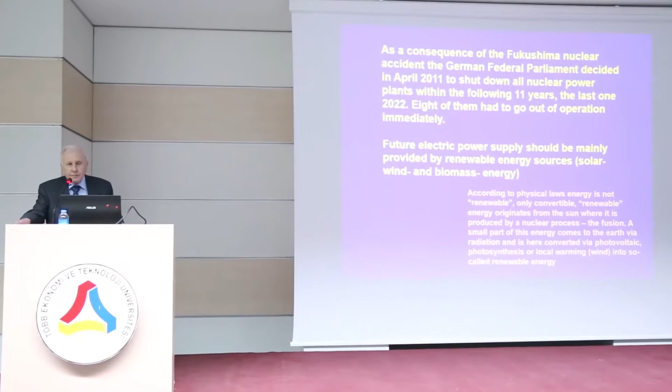About half a year before Fukushima, the German government decided to prolong the operation time of nuclear power plants in Germany. After Fukushima, they decided to phase out, so that all nuclear power plants would go out of operation within 11 years, with the last one shutting down in 2022. Eight of them had to go out of operation immediately.

The aim was really honest: to have a balance between sustainability, reliability, and economy. Let me discuss a little whether we reached this, or whether we are on the way to reaching it.

What changed after Fukushima? On the left-hand side we have power, on the right-hand side we have energy. People very frequently forget that energy is power times time.

Before Fukushima, about 45 gigawatts were invested in photovoltaic and wind. In nuclear power, there were just 20 gigawatts invested. But the energy is completely different.

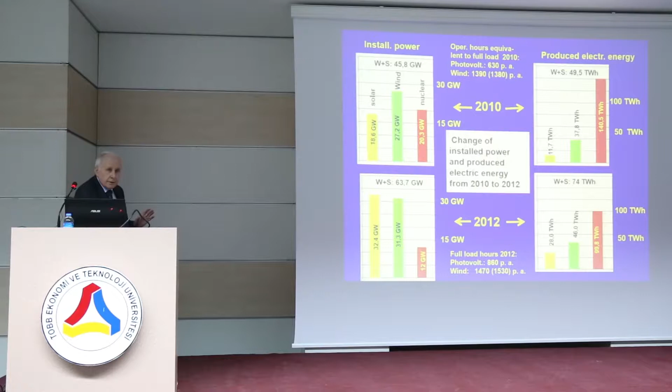Due to the short working periods of these renewable energy sources, I have to say at once: Germany is not a sunny country. So we still had a high amount of energy coming from nuclear power.

We had a high amount from nuclear power, and here it is after Fukushima. The green energy, from wind and photovoltaic panels, went up to almost 64 gigawatts. Still, it was much lower together than the energy produced by nuclear power.

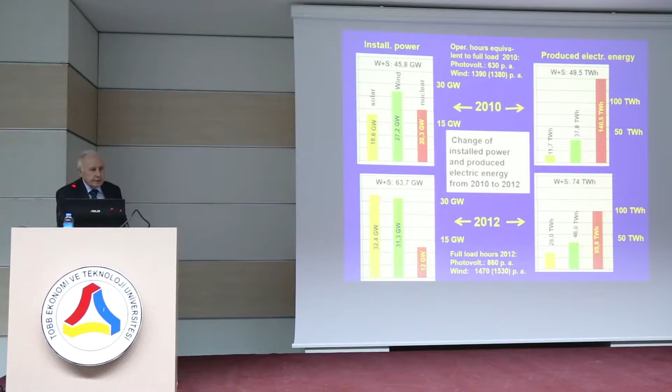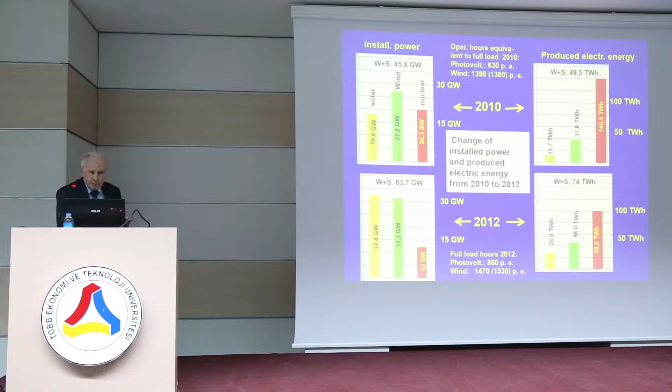The reason is, in Germany, photovoltaic panels have a so-called full load period of approximately 800 to 900 hours per year. Wind plants have a full load power period of about 1,400 to 1,500 hours per year. This is the reason, and this will follow us and cause us trouble.

So the intention of the German government to enlarge renewable power is very, very ambitious. You see, this is until 2050.

My problem is that I can't see it very well. But a man has glasses, you see, then I see it here.

So the intention is to install, by 2050, almost more than 150 gigawatts. The mean consumption at present is this one. So we really have much more installed power, not much more energy, but much more installed power in the future. Here we are, about in 2014, 2015.

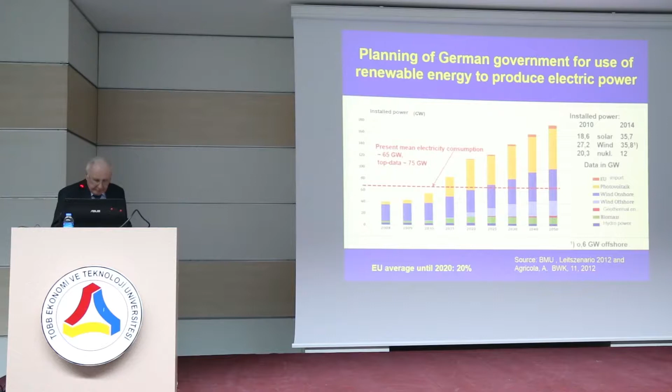Now let's discuss reliable supply. Is sun and wind energy reliable?

As I told you already, Germany is not a sunny country. The month has in total between 720 and 744 hours of daylight. In summer we have quite good irradiation, about 250 sunny hours. In winter, January and December, we have very few sunny hours. This means the output of photovoltaic panels fluctuates a lot.

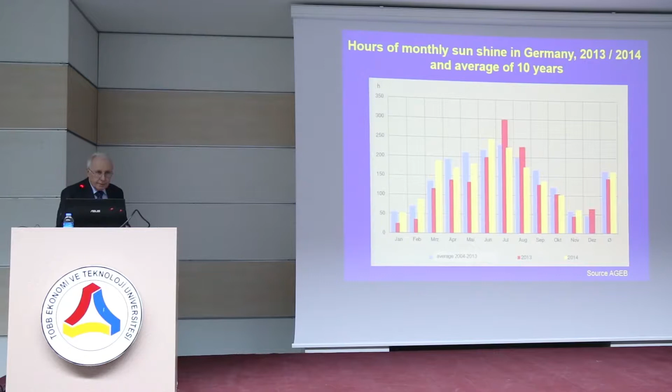It is similar with wind. We have wind velocities between 5, 6, and 7 meters per second. We have very strong winds at the coast of Germany, and much lower wind going south. People should know that the electric energy output of a wind plant goes with the third power of the wind velocity. This means very simply, if the wind velocity is reduced to 70% further south, then the power is only 0.7 times 0.7 times 0.7, which is 35%.

That's also the reason why, for example, in Bavaria, wind plants are up to 200, 250 meters, but then they are not very beautiful to the country. So the best wind situation is in Scotland, north of Scotland.

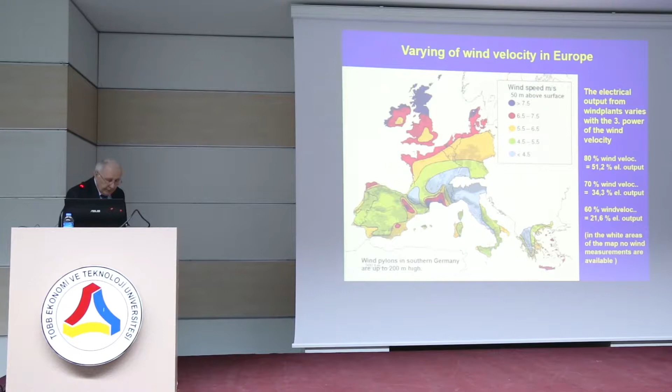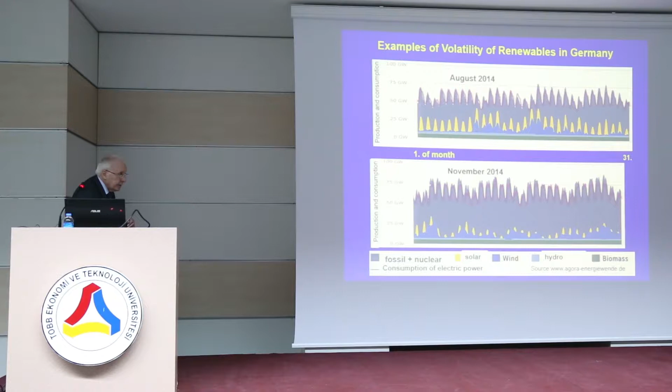And this, now here perhaps a little more drastic picture. This is December, between 1st and 10th of December 2014, and also between 1st and 10th of June 2014. If we just compare it, the contribution of sun, wind, and biomass in winter was in the order, if I remember well, of 3.5 gigawatt. In summer, it was in the order of 29 gigawatt.

So the difference had to be filled by fossil and nuclear power stations. This means in summer, you don't need many of them. So 26 is about a capacity of 32 fossil power stations. In summer, you don't need them. In winter, you need it. But they have to always be available, most of them have to be in hot standby.

This has, in future, the consequence that these fossil power stations do not earn enough money because they cannot produce enough energy. So E.ON, one of our big utilities, lost 2 billion euro during the last 1 or 2 years. In future, this would mean that we not only have to subsidize sun, wind, biomass, and so on, we also have to subsidize the fossil-fired power stations because they are not economic anymore. And this is a strong burden.

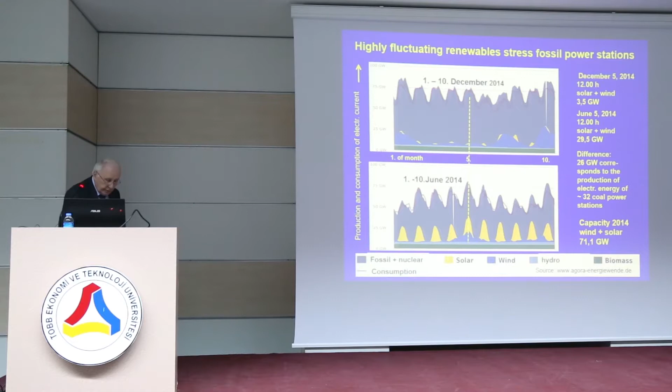Now you can argue, but with offshore wind power stations, it is much more stable because on the sea, the wind is always blowing. It's not quite true. You see here, again, in February and January this year, in this grid, which I show you, only about 600 megawatt were installed. And you see, we have full power, then we have calm, sea calm, and it's similar in January. You could have the same picture for summer and so on. That is, wind on the sea is more stable, but is not reliable at all.

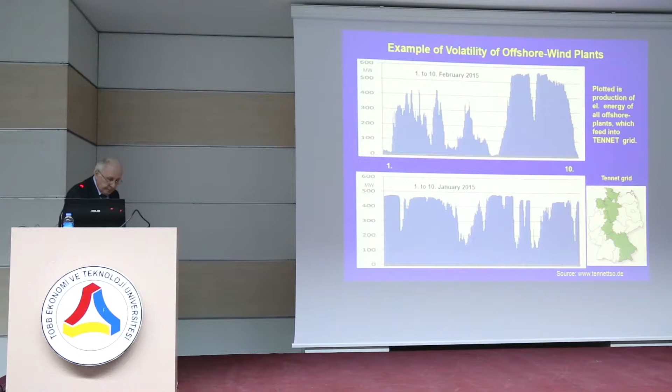What are the consequences? New power lines have to be built between north and south. Our politicians always say to bring the wind power to Bavaria and to bring the sun power to Lower Saxonia. That's correct, but not quite correct, because one of these lines should originate in the Lausitz, in Saxonia, which is the center of the brown coal area. So it brings stable electricity from brown coal to the south.

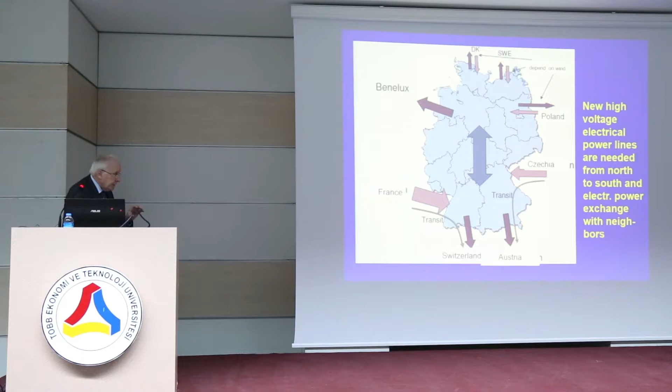In addition, if there is too much wind and too much sun, we export the electric power to the Benelux states. And on the other side, if there's not enough sun or not enough wind, we import electricity from France, from Czech, and so on. One very reasonable thing is, if there's too much renewable power, we export it to Austria, where it's fed to pump power stations. These hydro pump power stations fill up an upper water level, and when there is not enough power, it flows down again, producing electricity.

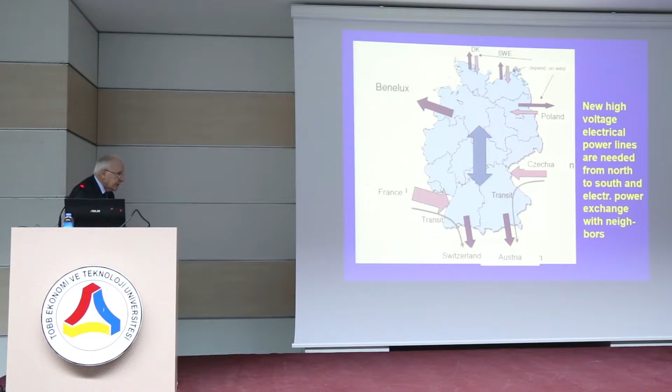The only problem is that we sell this electric power to Austria for about 2 cents per kilowatt hour, and we buy electric power from Austria for 5, 6, or 10 cents per kilowatt hour. And just to show you export and import, we import a lot from France, and as you know, this is up to 80% nuclear power. We import it, but we also export, mainly to the Netherlands and to Austria, and this is just an exchange. So the German island could not work alone. It needs its neighbors to support power supply or to take power from.

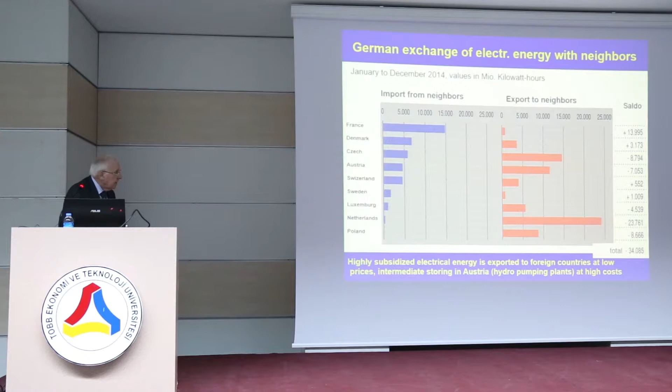One possibility would be storing the volatile power from sun and wind. The best storing possibility we have is hydropower, hydro pumping power. But our people are strongly against building new hydropower stations. There was one proposal to make a hydropower station near Tegernsee, the Walchensee, but it was cancelled due to protesting by the people.

Another possibility, I won't discuss all of them, is to compress air using wind power or electric power, and then expand the air again. If you compress air, not only the pressure rises but also the temperature. This means that if you store this compressed air, it slowly exchanges heat with the ambient and loses energy. Only if you could store the compressed air adiabatically would this work, but that's a very high problem, in terms of efficiency and cost.

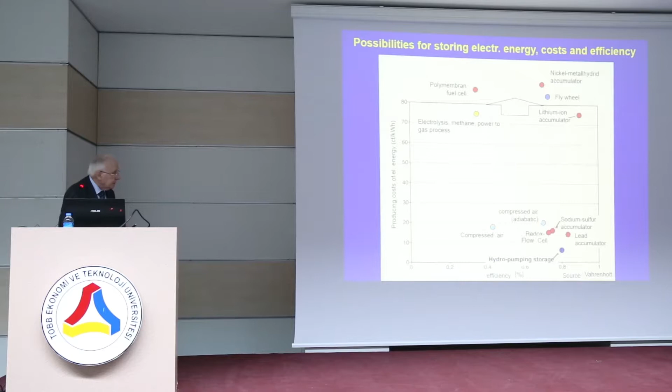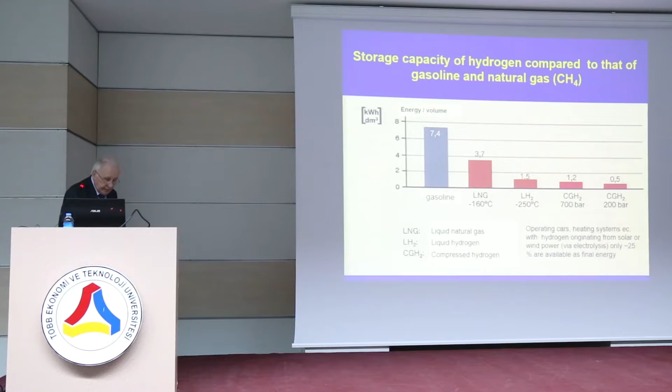In future we will have, and this was already briefly mentioned by the lady before, smart grids and smart meters. Smart grids is a good thing: you control the distribution of electric power depending on sunshine and wind, and according to consumption. Smart meters is a different matter - this is the way to a planned economy.

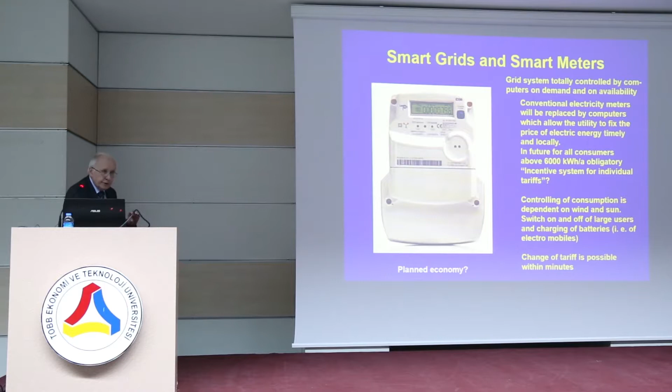Because if you use more than 6,000 kilowatt hours per year, you are forced to put a smart meter into your house. With this smart meter, it's not only metering the consumption of electricity, it can control the consumption. It can, for example, change the price of electric energy minute by minute, and it can also prevent strong users from switching on, or force them to switch off.

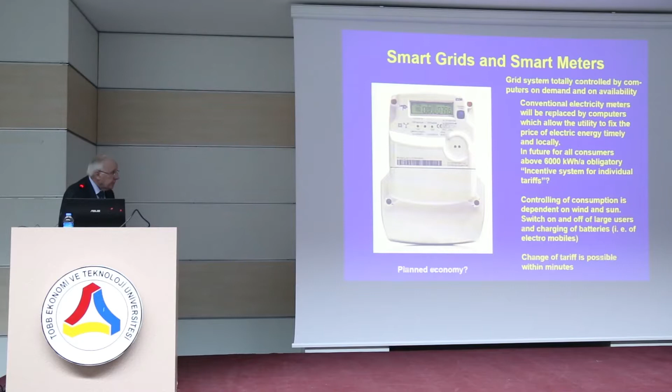So I see this as a problem. Now, economical supply.

The cost for photovoltaic panels certainly decreased between 2000 and 2012. But if you installed, or put into operation, a solar panel in 2004, you got almost 57, 58 euro cents per kilowatt hour, and this is guaranteed for 20 years, so until 2024. Later installations get lower rates. So you can already imagine what a burden this means for the German citizen.

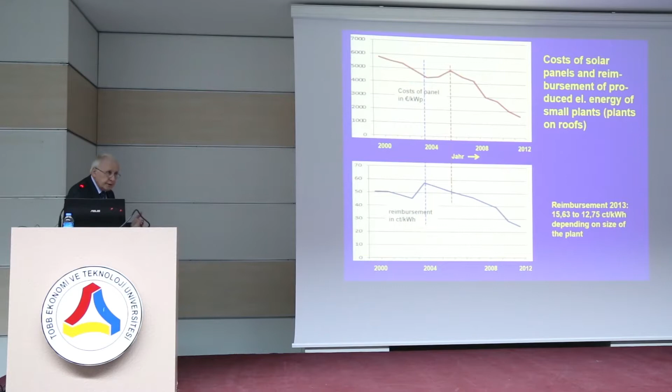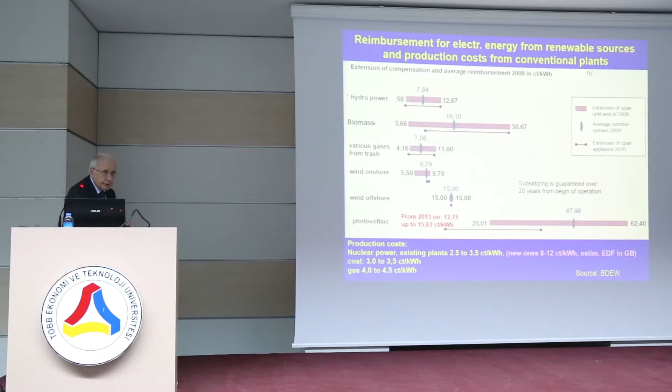And with photovoltaic it's even worse. You see, at the beginning we were in the order of 60 cents and even more. Now we are down to approximately, so up to 15 cents per kilowatt hour.

What consequences does this have for the financial burden? Here it's plotted: the light green one is the burden due to the energy feeding law, that is subsidizing wind, biomass, photovoltaic, and so on. This summed up in 2013 to about 20 billion euros.

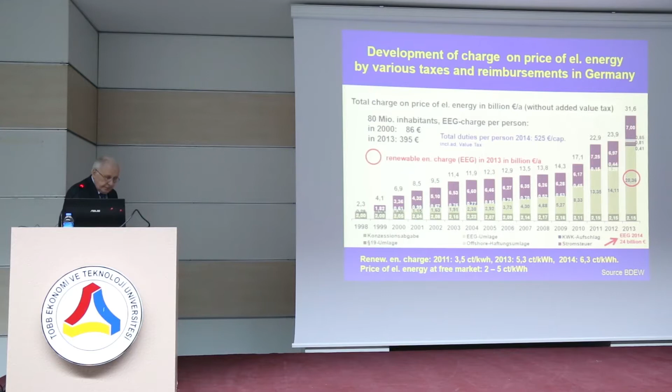What is to be expected in future? Here the upper blue line is photovoltaic, going down. The two red lines, dotted and through, are wind, and down here is coal and also natural gas. But biomass will still stay high, and we will end up with maybe 10 to 15 cents per kilowatt hour just for renewables. This really stays expensive.

We have to realize that future nuclear power stations, which will not be built in Germany, and future fossil power stations are also producing electric power much more expensively than now. There was a contract between EDF, the French producer, and the British government guaranteeing about 9, 10, 11 cents per kilowatt hour. The existing nuclear power stations produce electric power for 2.5 to 3.5 cents per kilowatt hour, and fossil-fired power stations for 3.5 cents per kilowatt hour.

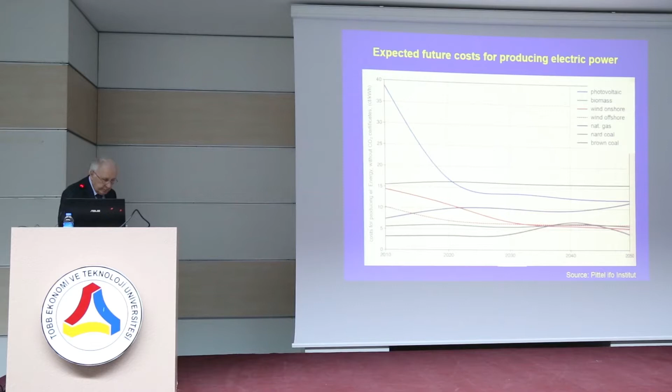We also have to take into account the so-called external costs, due to CO2 emissions and also harvest damages and material damages. But these are much smaller, on the order of 1 cent, not percent.

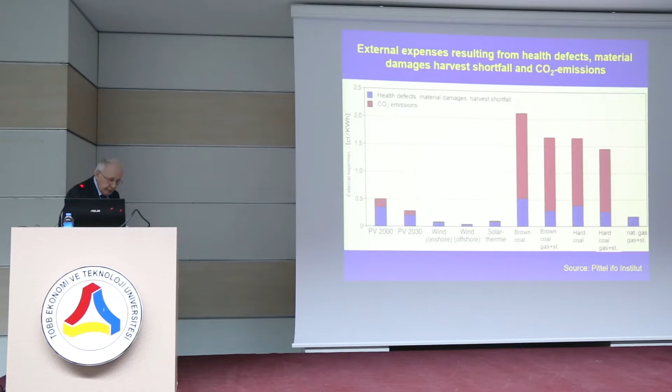We were talking a lot about energy in buildings, the benefit you really have from making buildings highly efficient. With all other approaches you pay, so this red one shows the costs per kilowatt hour.

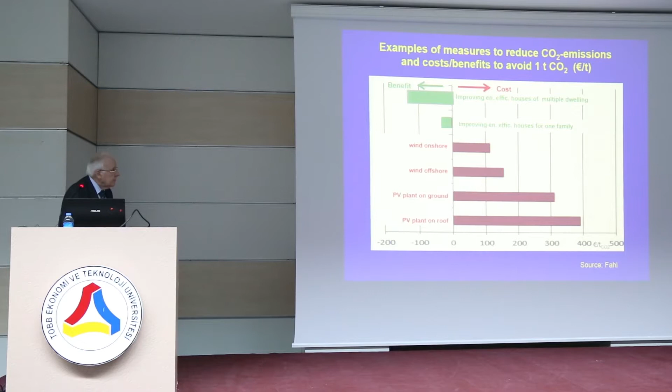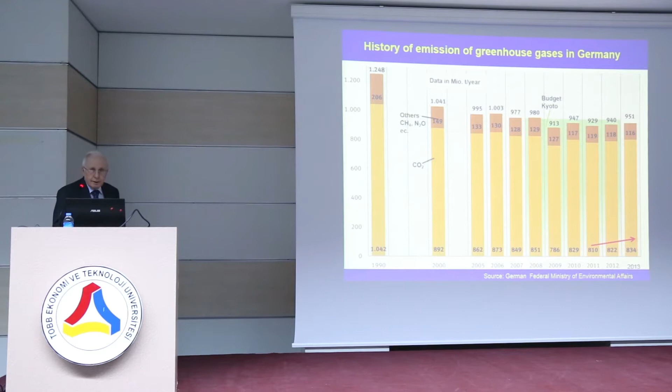Now finally, sustainability. With sustainability you primarily think about CO2 emissions. Germany really reduced its CO2 emissions in the 90s, due to increasing efficiency in industrial processes. The driver was not a governmental order, it was purely economic reasons. Germany is a country of high salaries, and we had more and more problems with our products being too expensive. We could not lower the salaries, so the only way we could lower costs was the energy costs.

Now, in the last 3 years, from 2011 to 2013, CO2 emissions were increasing. It's not astonishing if you shut down 8 nuclear power stations, which produce electric power at almost zero emission, and replace them to a great extent with fossil power stations, that CO2 will increase again.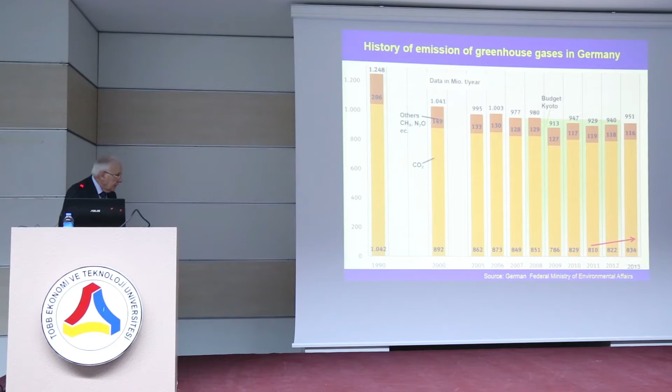Let's have a look at how this is worldwide. In 2012, the total CO2 emission was about 33,000 million tons. The strongest CO2 emitters are China and the United States.

Turkey, I didn't mention here, but you see it here. Turkey is on the order of 300, 320 million tons per year. This means if Turkey reduces its CO2 emissions by 10%, this has a global benefit of 1 per mil.

If these two countries, China and the United States, reduce their CO2 emissions by 10%, this has a global benefit of 4%. This doesn't mean Turkey should do nothing, but each country has the right to balance cost and benefit. If the benefit to the global atmosphere is very low, the country really has to think about how much cost it can put on its citizens. Now, another astonishing picture.

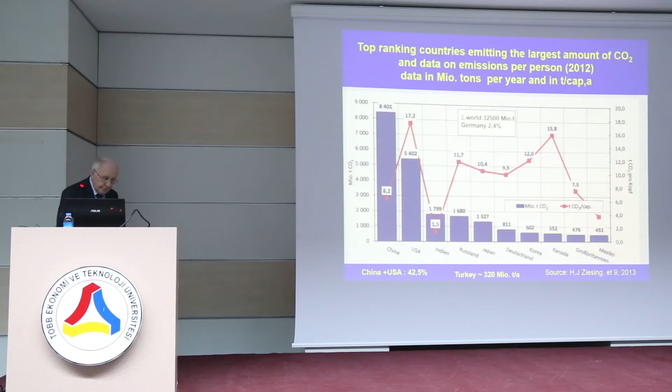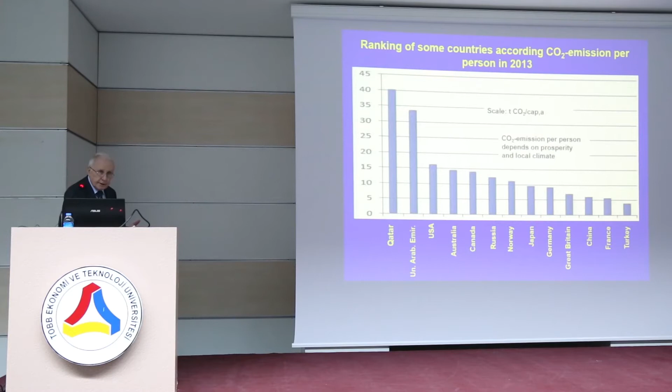To talk about sustainability, we have also to think about the resources and reserves. Newer prospecting activities showed that we have a large amount of brown coal worldwide. By fracking, a large amount of gas was found, and hard coal is also still enough. So fossil resources will last still for many, many years.

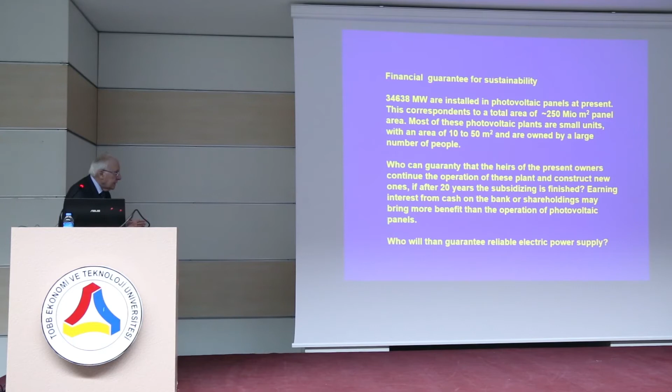In the future, in 20 years from now, the owners of these photovoltaic panels will not be alive anymore. What will the heirs do? Will they plant new ones, even knowing they won't get the same reimbursement their fathers got? Or will they say, no, I prefer to put my money in the bank, where in future I might get a higher interest? So who will or can guarantee the electric power supply from photovoltaic panels? It's not in one hand, it's in the hands of millions of private people.

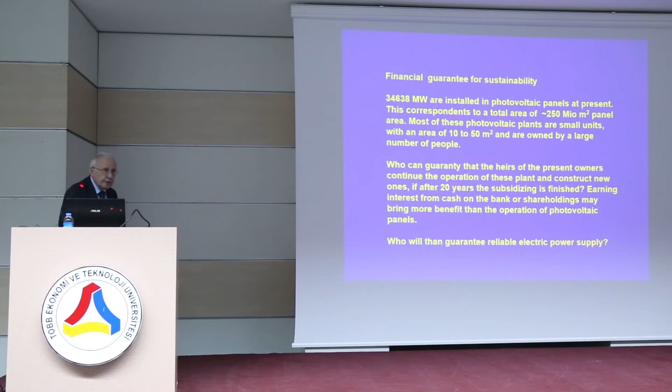Now what's going on? Are renewables the real future sources? Frankly speaking, I read a new paper that worldwide only 1%, or a little less, is installed in renewable power producing electric energy. Natural gas, I think yes, it will increase. Hydropower is a question of the countryside, the topography of the country. Coal and nuclear power, I personally think it will still be a mix of them.

Being not only a pessimist or optimist - we have a saying in Germany: the optimist sees the glass still half full, the pessimist sees the glass already half empty. As an optimist, I would say yes, we have to continue our way, but to bring it to success is only possible as long as our people are rich and our country is rich, and we have to face a lot of competition worldwide. The pessimist in my body says the German energy turn will fail.